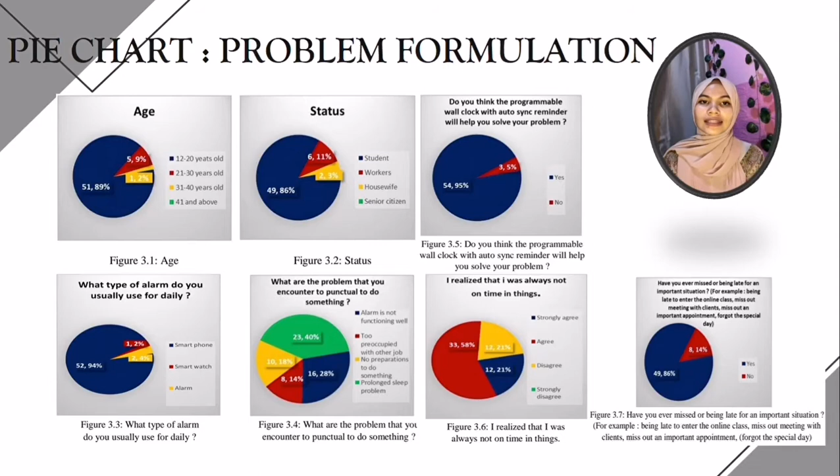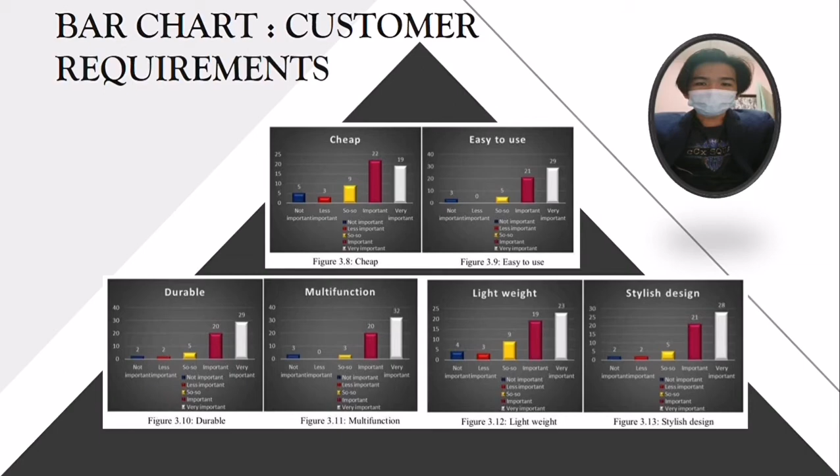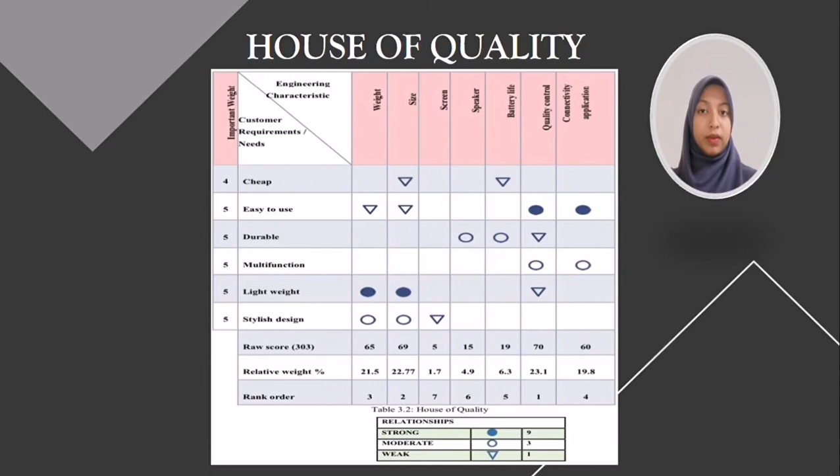Next, this is the house of quality of our group. The house of quality is defined as a product planning matrix that is built to show how customer requirements relate directly to the ways and methods companies can use to achieve those requirements. The house of quality is considered the primary tool used during quality function deployment to help facilitate group decision making.

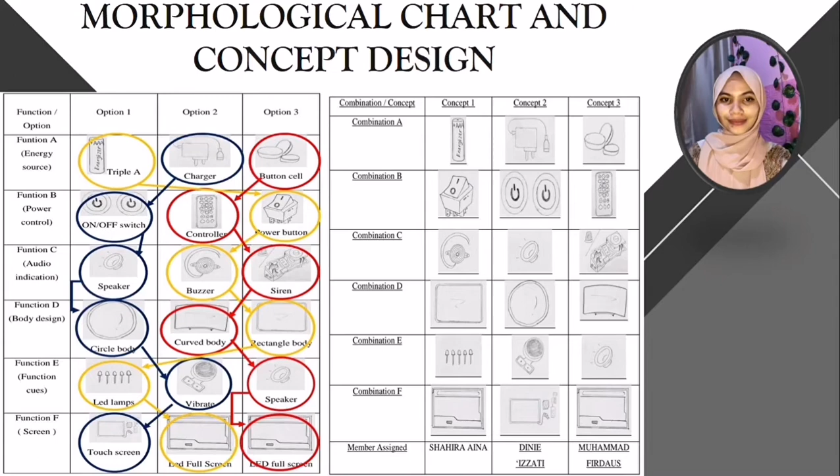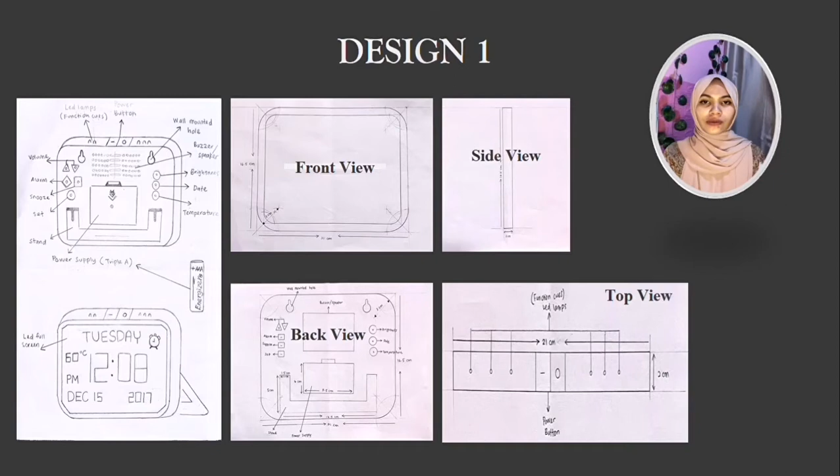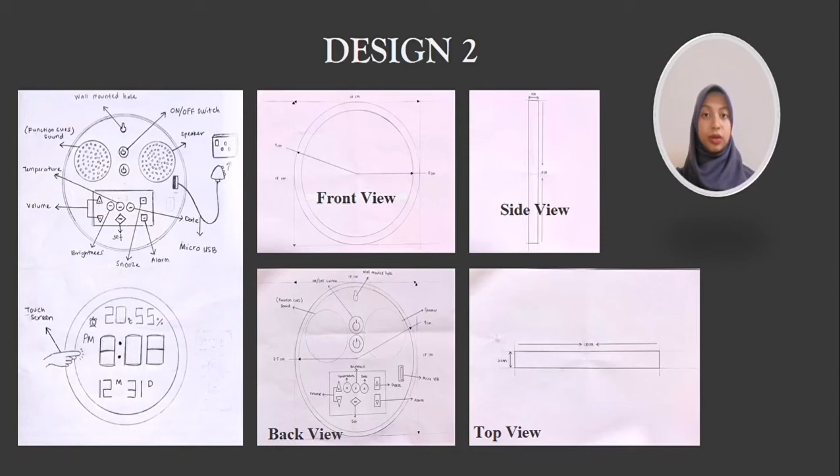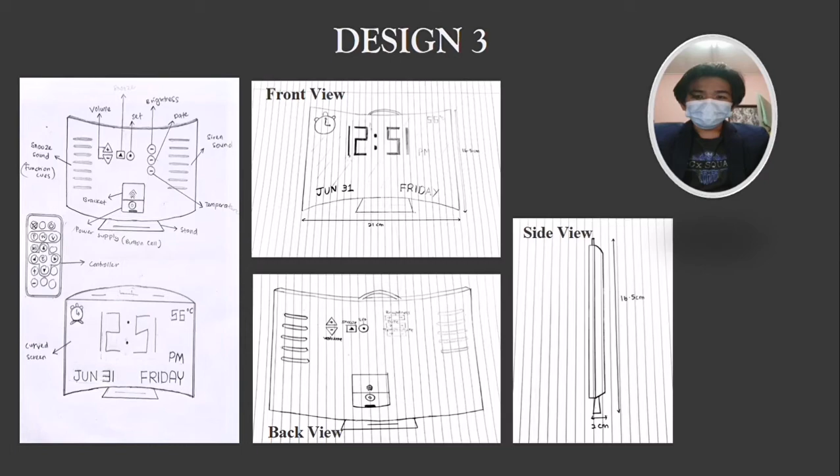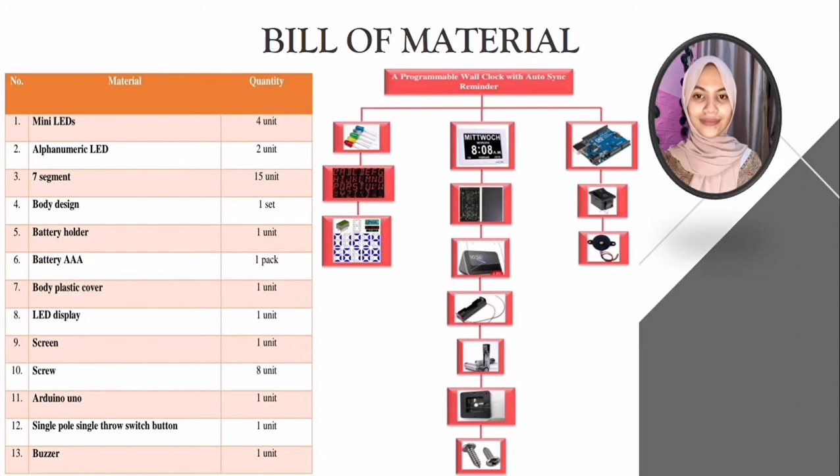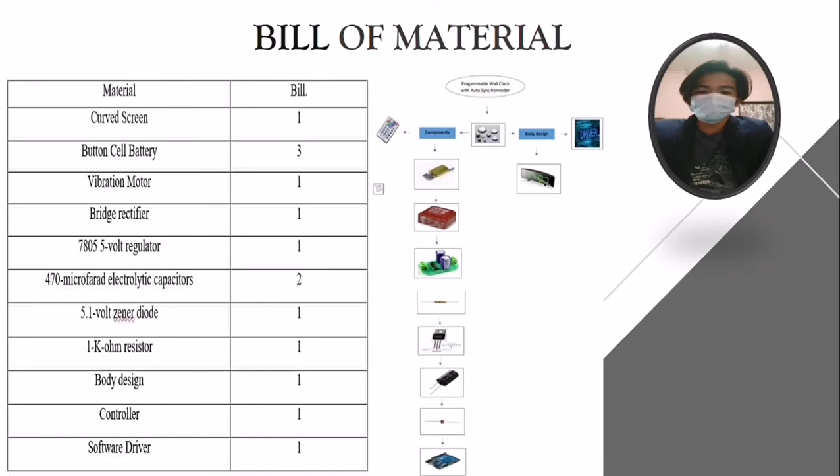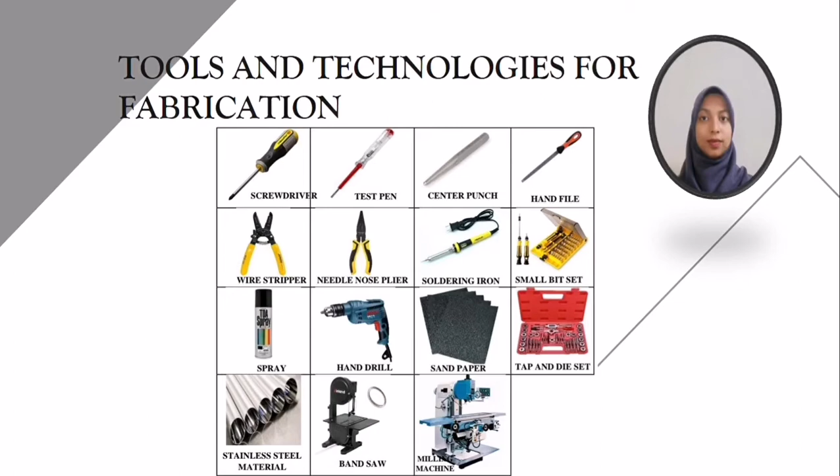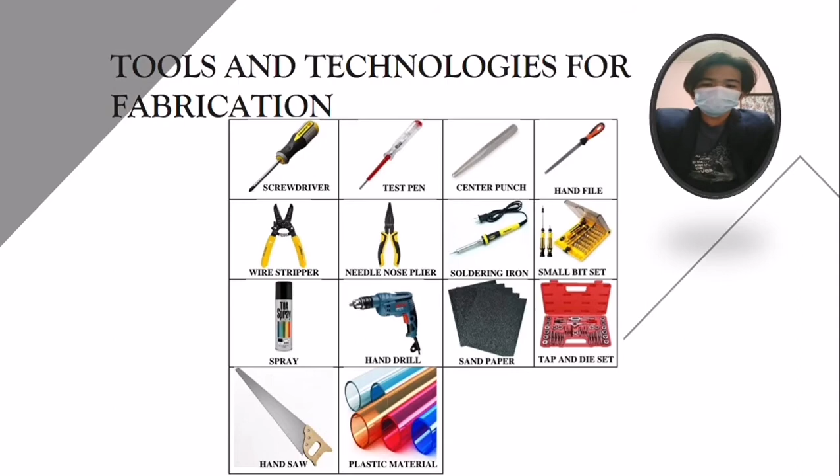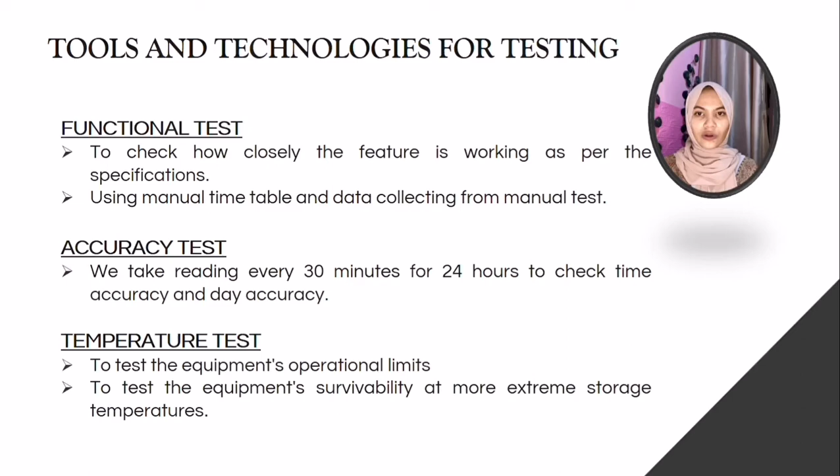Expected result: once people use a programmable wall clock with auto sync reminder, people will remember and not miss any important day and event anymore.

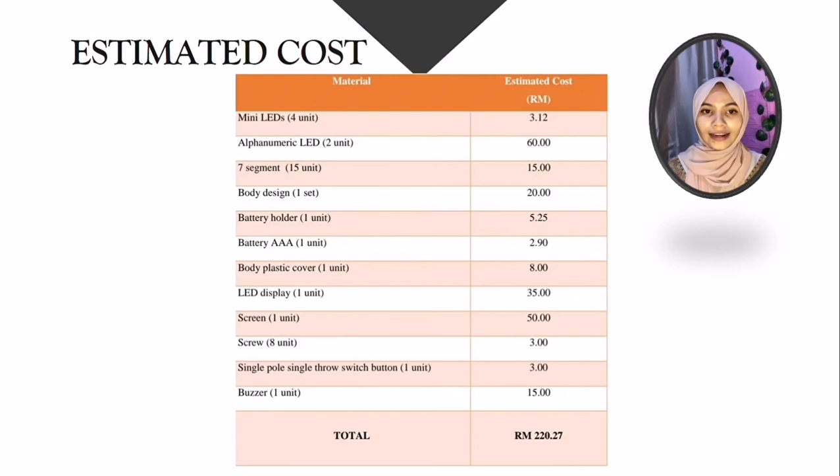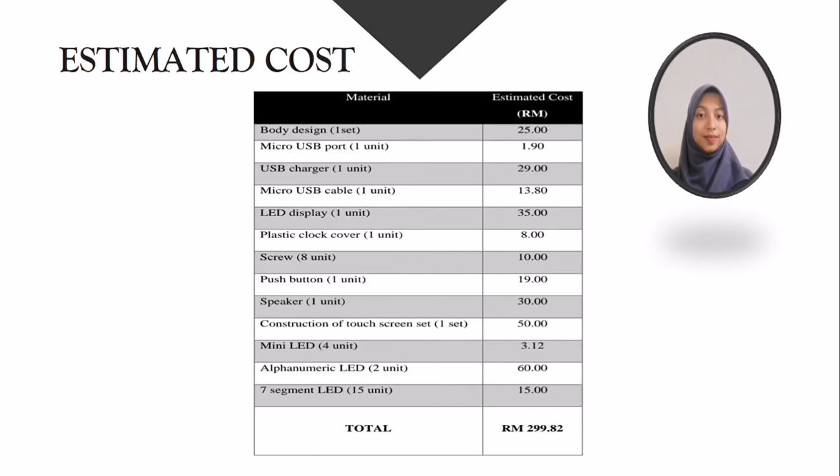RM220.27. Then, as we can see here, this is my estimated cost that I have totaled based on my bill of material. Overall, the total is RM299.82. This is the estimated cost for my design.

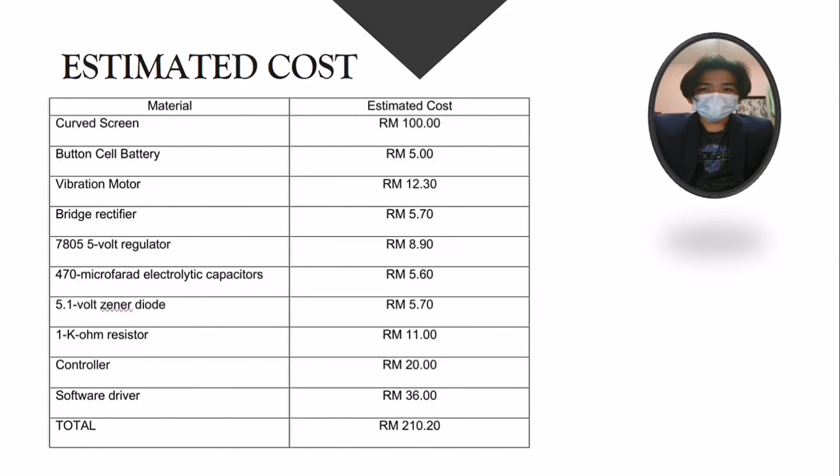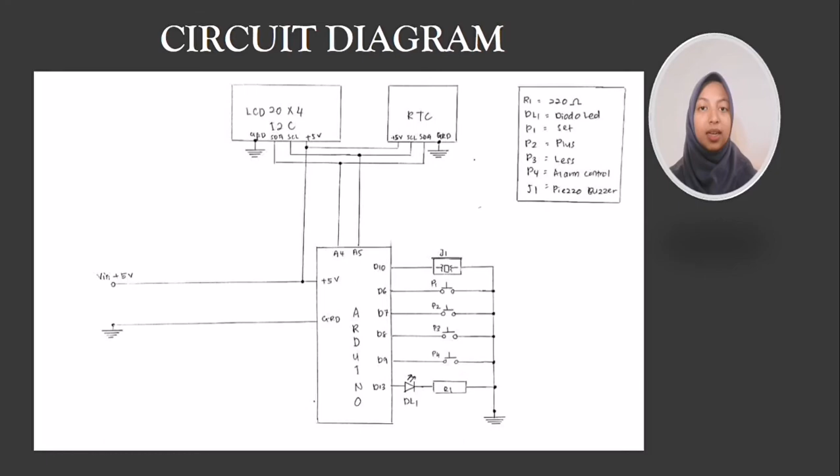There are some items with high price and some items with low price. The total for my design is RM210.20. This is my clock circuit diagram. So here is my programmable clock with auto-sync reminder circuit. This is the circuit for our programmable wall clock with auto sync reminder.

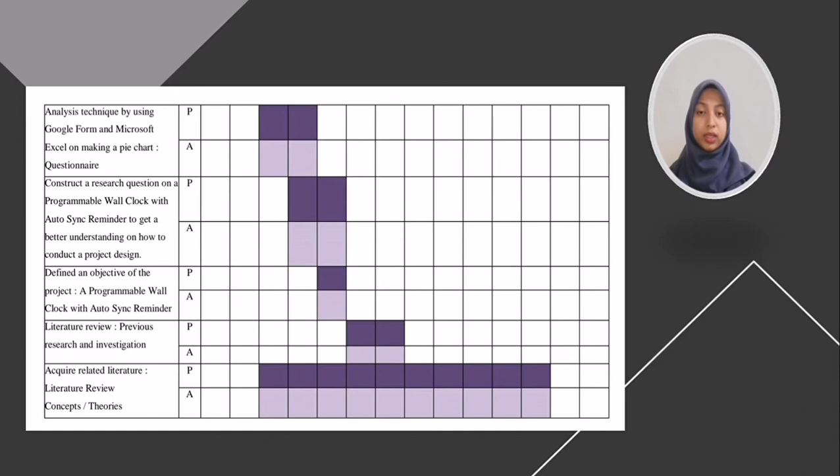Then actually we started to do a literature review for concept and theories starting from week 3 until week 12. The activities that we do for week 8 to week 13 are identify characteristics of product and innovation developed, survey of the characteristics of the product, and making analysis for house of quality, idea generation, morphological chart, concept design, and technical drawing.

For week 11 to 13, we identify the bill of material and analysis Pugh chart. We start to write the report from week 2 to week 13. Preparing PowerPoint for the proposal presentation video started at week 13, and we submitted our proposal logbook and video presentation in week 14. This is our presentation proposal. Before we end, we'd like to show you concept selection by using Pugh chart, for next semester project 2. Alright, that brings us to the end of the presentation.